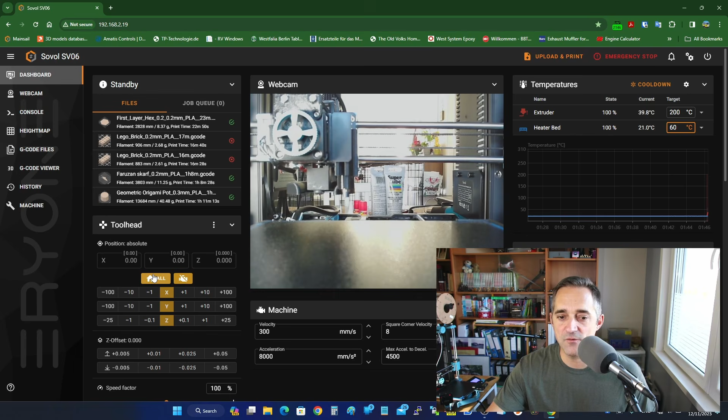So first thing, temperature. We're going to set the nozzle to 200 and the bed to 60. Those are pretty standard values for PLA. We let this heat up real quick. In the meantime, we want to home the printer. As you can see, it's running all the axes, and now it's going to probe the bed.

And the probe is the inductive type. It reacts to my metal print bed, and it assumes, okay, I know where I'm at, and here's the Z height, so to speak.

Then, I don't know if you can see my pointer here. Z is now setting at 10 millimeters above the bed. So Z 10 millimeters is literally the distance between the nozzle and the bed. At least that's what the Klipper computer assumes, right? If I would now put it to 0, it should touch the bed.

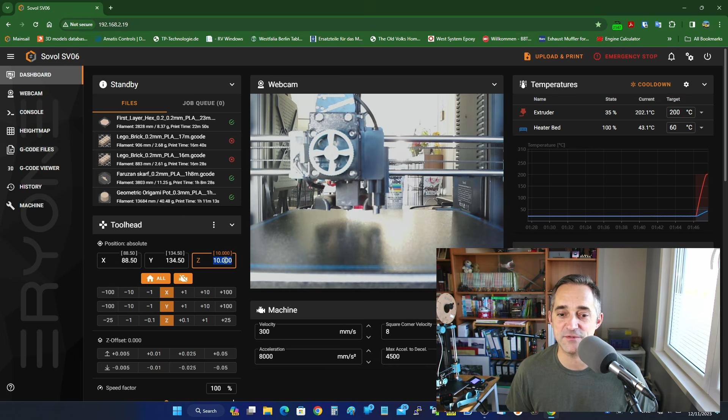Since we have a fancy magnetic metal print sheet with some PEI coating on there, we don't always want to touch down right onto the bed, because if our Z offset is wrong and the nozzle actually goes too low, it might damage the bed or it damages the brass nozzle, and we don't want to have that happen.

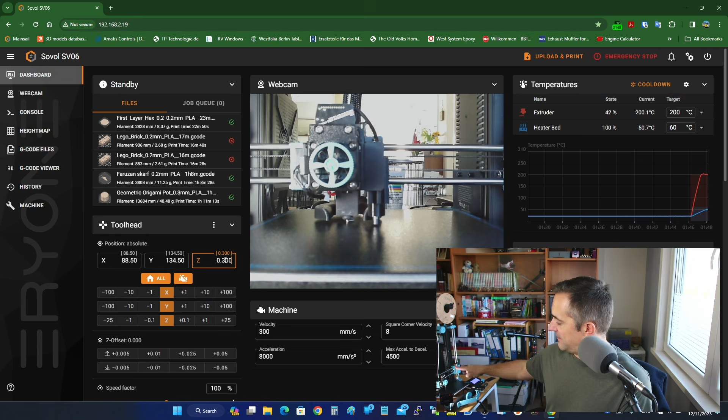So what I'm going to do is set it. You could set it at 0.5 millimeters if you wanted to, but here in my case, we're going to use 0.3 millimeters. 0.3 millimeters, and press enter. Oh, and there's already some oozing going on. You've got to make sure that you don't have any filament on your nozzle, because that might cause an error in your Z offset.

So now the print head has moved to what the computer thinks 0.3 millimeters is. Now we're going to take a feeler gauge. Where is it? There's a 0.3 millimeter feeler gauge in here, and we're going to shove this between the bed and the nozzle. Yep. And that also pushes a little ooze of filament out of the way. So now I have my 0.3 millimeter feeler gauge between the nozzle and the bed, and it's too loose.

So now let's look at the screen here real quick. Below the section where you can just move your axes around, so if you want to move your x-axis or y-axis, you can just click on plus 10 and it moves there, below that section is a Z offset. Currently, we're at 0.3 millimeters and my Z offset is 0. So these are the corrective little incremental movements that will correct the position of your nozzle in relationship to the bed.

So as I just said, the computer thinks it's at 0.3 millimeters above your print bed, but my feeler gauge just confirmed that it is a little high, because the feeler gauge is loose in there. There is no friction whatsoever. We don't want much friction, but we want to feel that the nozzle and the bed both make contact with this thing. Currently, we're too high.

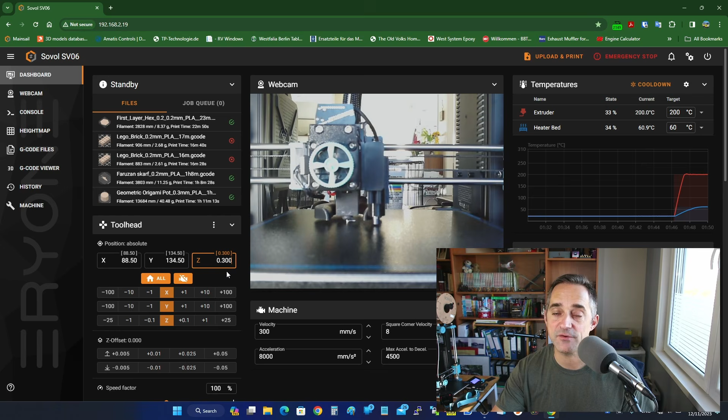So with the Z offset section down here, you make a correction. The computer will continue to think it's at 0.3 millimeters, but where that 0.3 position is, you will correct by either minus, bringing the nozzle down, or by plus, bringing the nozzle up.

So feeler gauge in here, it's always a little complicated to do. My left hand. My pointer here is right on minus 0.01 millimeters. That's 1/100th of a millimeter. So I have my feeler gauge there, and I'm just going to click. So now the nozzle is coming down in little increments of 1/100th of a millimeter until I feel that I have some friction.

Oh, we're getting there. One more. No, not yet. Oh. So now I have ever so slightly a little bit of friction between the nozzle and the print bed. Now I could potentially do another 0.005 of a millimeter. Let's do that. That's 0.005, right? So 0.005 of a millimeter, just to increase the friction ever so slightly. So that feels pretty good to me. You will have to experiment with that a little bit.

So we just made an incremental correction of where that 0.3 millimeter is. If you look up here, position absolute, we haven't moved the z-axis. It's still saying 0.3 millimeters. We just corrected where that 0.3 millimeters is. And right above in parentheses, it shows a relative position. From our little incremental step downs, it will still show 0.3 millimeters, but we have corrected where 0.3 millimeters is.

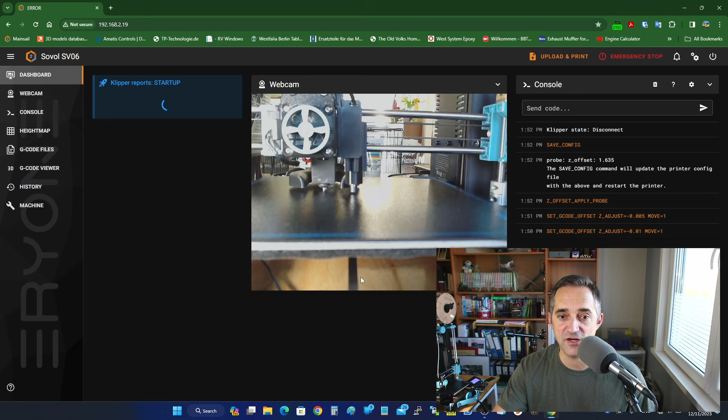Right? Right above the Z offset section, and we just moved it down by 0.085 millimeters, is a clear, so we could bring it back to 0, or a save button. If I click on save right now, it will do save config, yes. Then it does a quick little restart. Klipper reports startup, and here we go, initialize. And so now we have to home again because now the printer just lost its brain. It doesn't know where it is anymore.

If I now rehome the whole thing, the first thing Klipper always does is raise the tool head so you're not scraping your tool head across your bed. And then it homes again, not with the nozzle, but with the inductive probe. And it moves to where it thinks 10 millimeters above the bed is. Now we're going to put it back.

Oh, temperatures, by the way, they were also turned off. So we're just going to re-engage the heating here, just so that we have the same conditions. We bring the temperature back up where it was. That only takes a few seconds. As you guys know, the extruder or the hot end really heats up quick, and the bed was still at 58.6 degrees, and it's slowly coming back up to 60. So we're already back there.

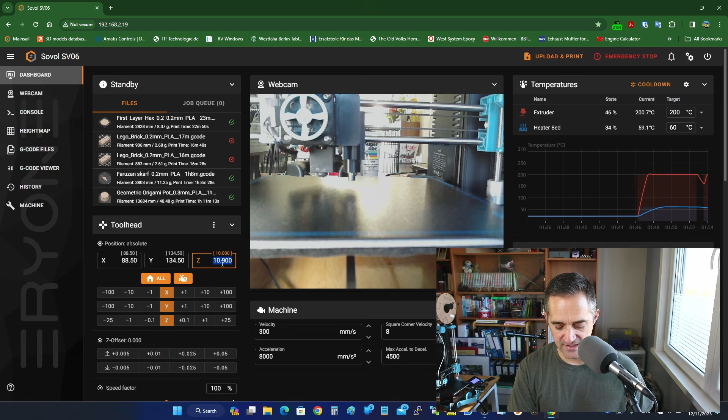So now I'm going to use my keyboard again, put 0.3 millimeters in here. It moves the nozzle to where it thinks 0.3 is. And we again use the 0.3 millimeter feeler gauge and shove it right in between the bed and the nozzle. Again, pushing a little bit of the oozing filament out. There is friction. I still find this a little too loose. So sometimes you have to do this a couple times just until you get it just so.

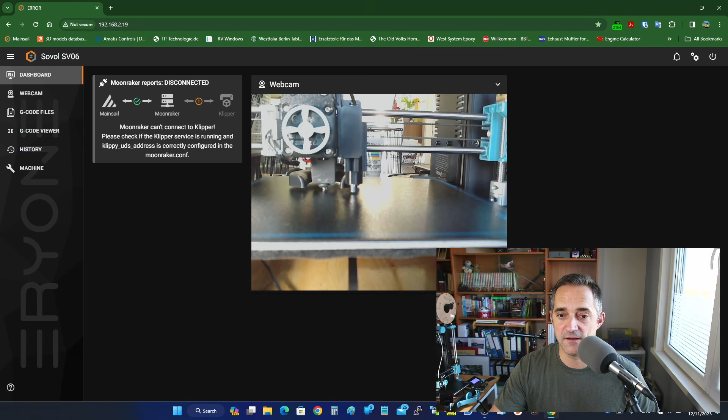I'm just going to bring it down maybe another hundredth of a millimeter. Yeah, we're already there. That feels pretty good. Maybe let's give it another. Yeah, this is perfect. So we just did another slight correction. This will be followed up by another save config. And then it reinitializes. We're going to do that like 2 or 3 times. 5 minutes later. So we don't need to do any more adjustments. Currently, the print head is exactly 0.3 millimeters above the print bed, at least in that location.

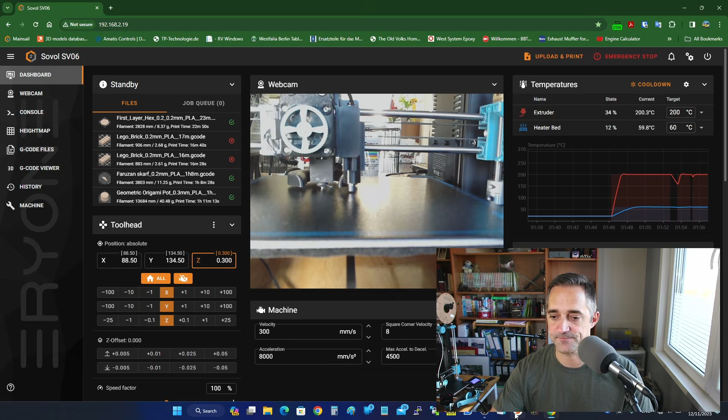And now if you start a print and the slicer, here, let's look at a slicer real quick. Slicer, I use Prusa slicer. And here it is. Let's open this wide. So if you go into your print settings, you always have first layer height and then you have layer height. That's all the subsequent layers, right? Here in this case, first layer height is 0.3 millimeters.

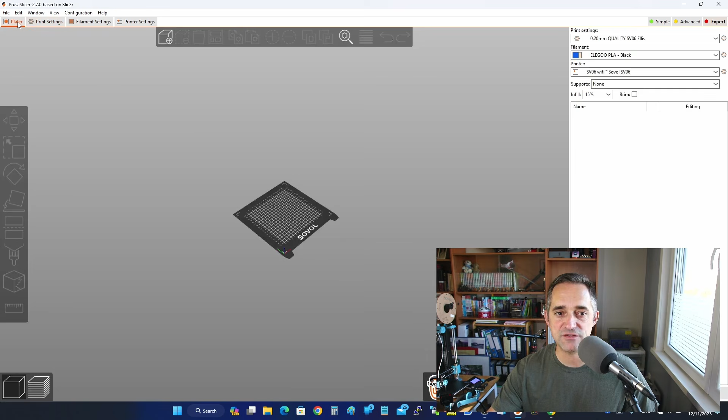Instead of just talking about it, I think we're just gonna, here, I think I have a thumb drive. Oh, here we go. Okay, there it is. And in here we have some print projects. Oh no, why does it open that. There is a first layer hex, which we're going to be using here.

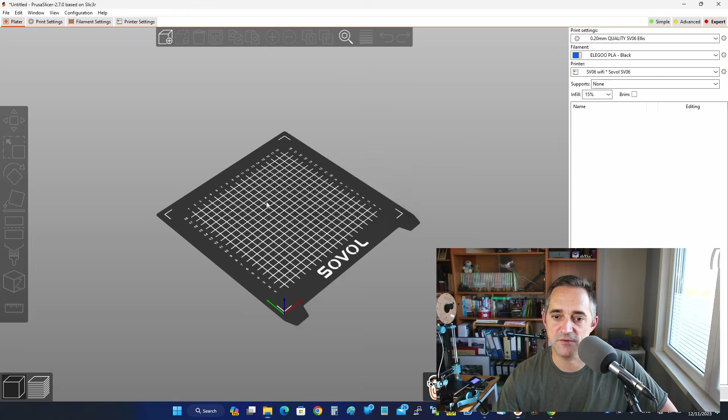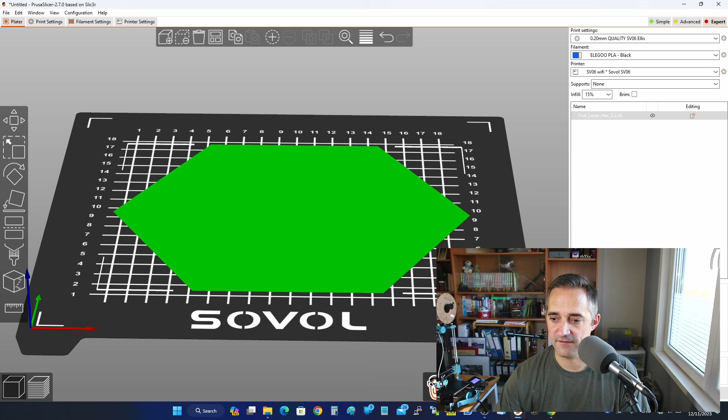And we're going to scale this up a little bit. What are we going to do? We're going to do 200% of the size, or 220%. And here as well. We don't want to make it thicker. That's why I took the scale factor off here. All right, now we have a big ol' hex on here, right? So we can locate that in the middle. We can slice it. Now it did the slicing. Let's see that we don't have a brim. I don't want to have any outer brim.

It just has a skirt around it. That's good enough. So that's good. Let's transfer it over. It will do a Klipper adaptive mesh and purging. What that means is it will only mesh the area where you actually print on, which then brings the mesh points closer together and makes it more accurate. So it gets a more accurate picture of how hill and dale your print bed is.

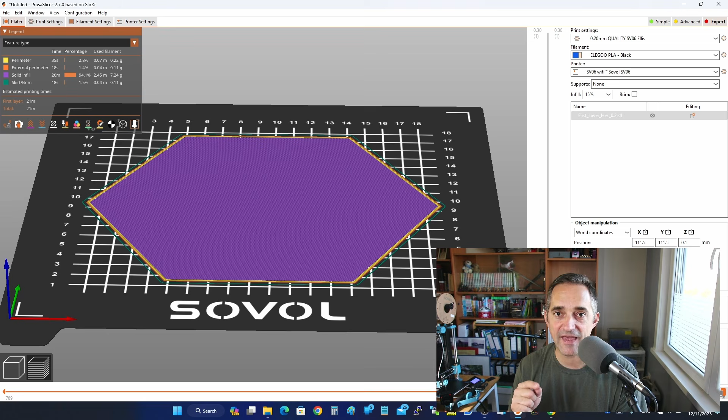So if you run Klipper in some shape or form, Sonic Pad, maybe you have a Sovol printer and you just bought one of those Sovol Klipper pads, or you have a Raspberry Pi running Klipper. If you don't use KAMP, get it, install it, configure it. It's great. So let's upload this to the printer here.

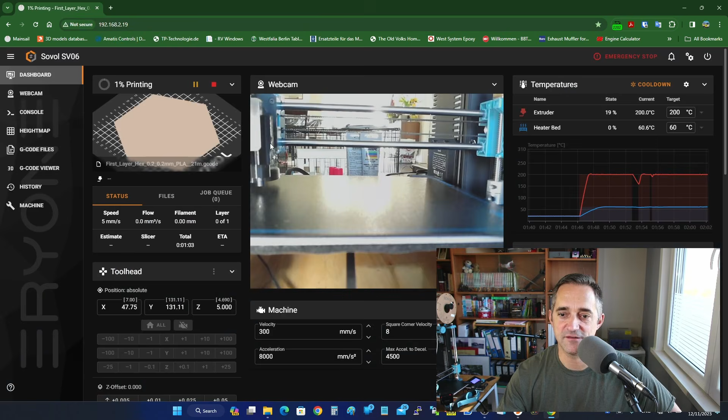So the transfer over to my printer is already done, so we can close this up. And now you see it's homing. We're already at temperature, so that's pretty good. So that was just the Z homing there for a second. And now it does the KAMP mesh, Klipper adaptive meshing and purging, okay? So that's what that stands for. So now it really only meshes the area where the print object is gonna be.

And as you can see up here in the status section, I actually have a visual representation of the part on my print bed, which is really cool. Let's say you have 20 parts on your print bed. It shows 20 little parts, and if something goes sideways and one of your 20 parts tips over, you can exclude that and keep printing the other ones. And that is actually pretty nifty.

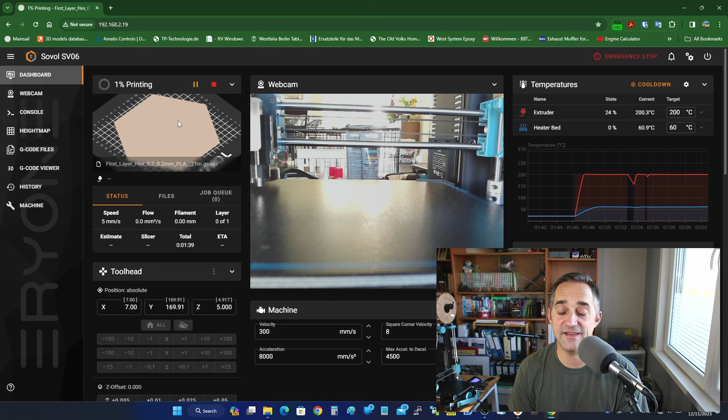Now we're gonna see if my Z offsetting to 0.3 millimeters above the bed, so we're just correcting the height above the bed with a feeler gauge, and the correction is done down here in this Z offset section, if that is a good idea or not.

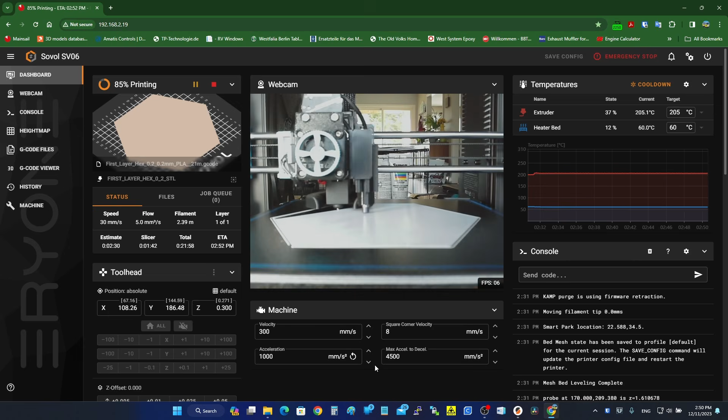All right, guys, I was just talking to myself. So I peeled the build sheet off. Here is the part that we just printed. I already pulled the skirt off, just one layer. So white is a little bit bad color to show details. But the texture from the build sheet is nicely imprinted on the first layer here. And then the individual lines adhere to each other really well, so I cannot pull it apart. And overall, this turned out really well.

Instead of using a piece of paper, I set my print head, my nozzle, to be exactly zeroed. So if I punch in 0, nozzle touches bed. If I punch in 0.3 millimeters or 0.4 millimeters, a 0.4 millimeter feeler gauge will fit in there. And if it doesn't, then I use the Z offset section down in the Mainsail user interface and bring it down and make it just so. And then save the config, and then it's pretty much good to go.

And if your printer is very stable and it doesn't lose its adjustment or position very easily, you can do the Z offset adjustment, and as long as you don't switch to a different build sheet, you should be good to go for many, many prints. You don't have to do Z offset every single time. So occasionally, maybe if I change a nozzle, clean a nozzle, maybe if I change something on the printer, mess with some adjustments, after that I will do a Z offset. If I don't do that, I just leave it alone. And yeah, it works. So give it a try.